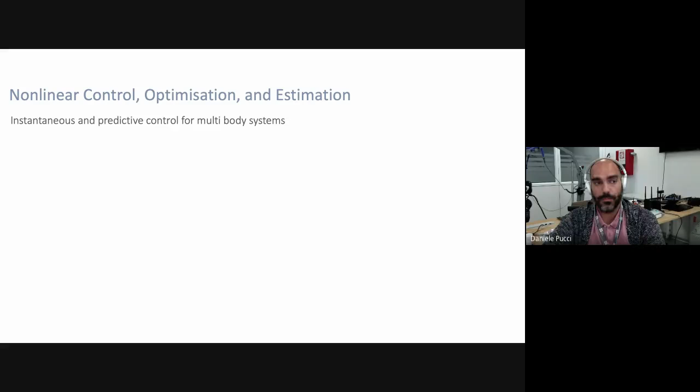As I was mentioning, we do research along fundamental directions. We are basically a group of nonlinear control people, and we do a lot of nonlinear control, optimization, and estimation. We also work a lot in model-driven engineering. Most of our controllers are fast prototyped in Simulink and MATLAB, and then we automatically generate code from high-level perspectives onto the real platforms.

And then we started working on reinforcement learning. So these are the fundamental directions that we have in the lab, that we apply onto vertical research axes.

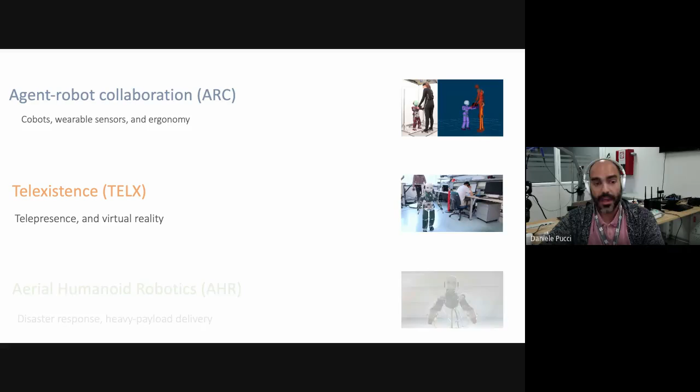The first one is agent-robot collaboration. We work a lot in human-robot collaboration. We also work a lot in so-called telexistence, which are advanced methods for humanoid robots. And then we also work in aerial humanoid robotics. Today I'm going to present some of the work we do here at IIT concerning flying humanoid robots.

First, let me talk about the why. Why should it be important to make flying humanoid robots? And in order to motivate this research direction, I want to show you a video.

This is Minami Sanriku. I never know if I pronounce it correctly, but it is a city in the northeast of Japan after the tsunami. As you see, the wave hits incredibly hard, and basically destroys everything in front of it. Then, back in time, the wave also hit Fukushima, and in that case, what we really needed was platforms that could go there and operate in place of humans.

More precisely, in these kinds of scenarios, if you really think about it, you need three fundamental capacities. You need platforms such as robots which have these three fundamental capacities.

You have fire between buildings, you have floods between buildings, so you want to overcome these kinds of barriers. You need aerial locomotion in order to overcome barriers such as floods and fire, and then move from one building to another.

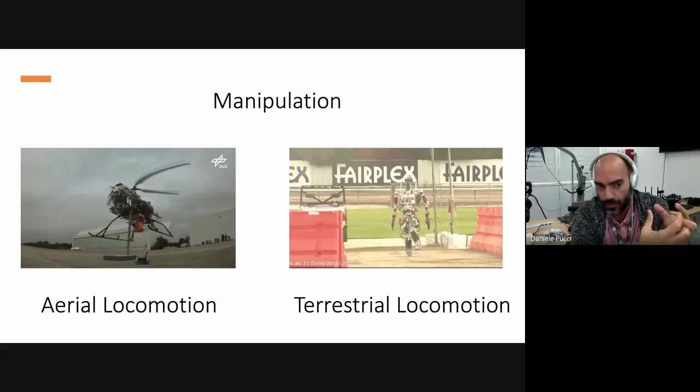If you look at the literature, there are basically two big fields. The first one, on the left-hand side, is so-called aerial manipulation, which consists of having quadrotors, flying vehicles with arms attached to them, so they have aerial locomotion and manipulation. On the right-hand side, you see humanoid robots, which have manipulation capabilities and terrestrial locomotion.

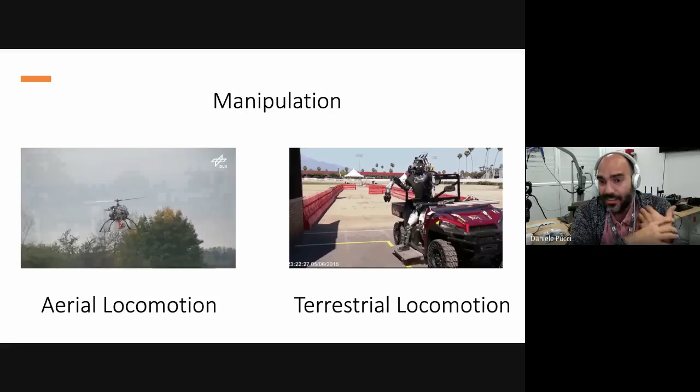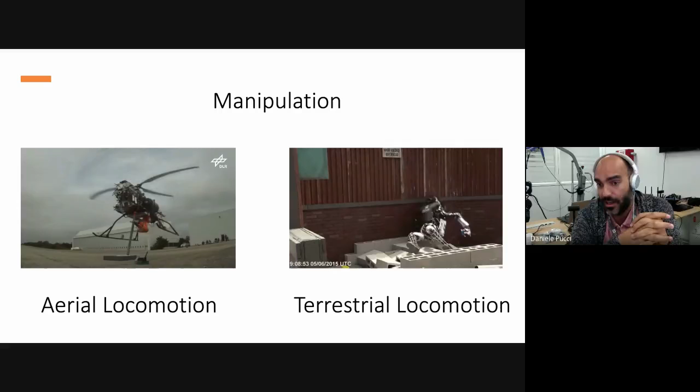So what are the drawbacks of these two systems? On the left-hand side, you have aerial manipulators. They are not really efficient when manipulating objects while hovering, and they are not at all energetically efficient while hovering indoor. They could simply land and move thanks to terrestrial locomotion.

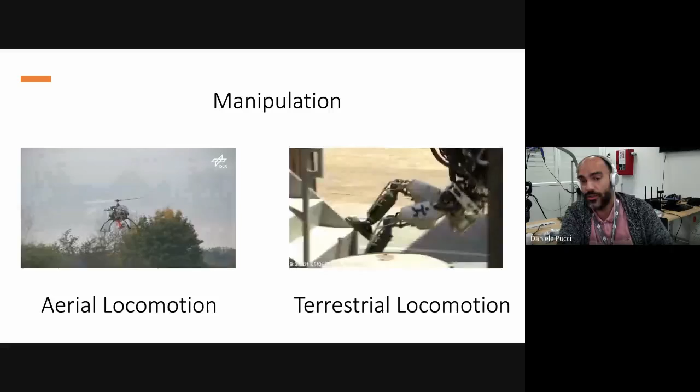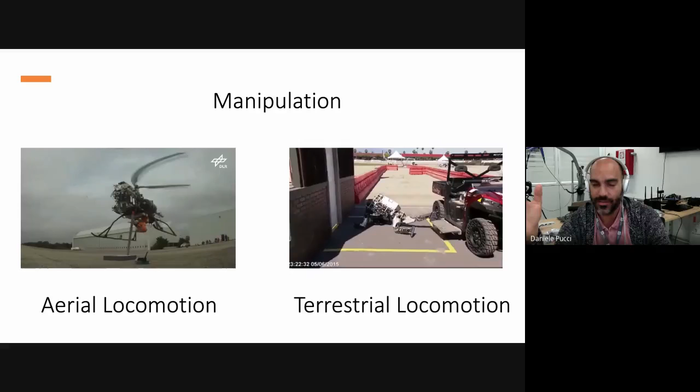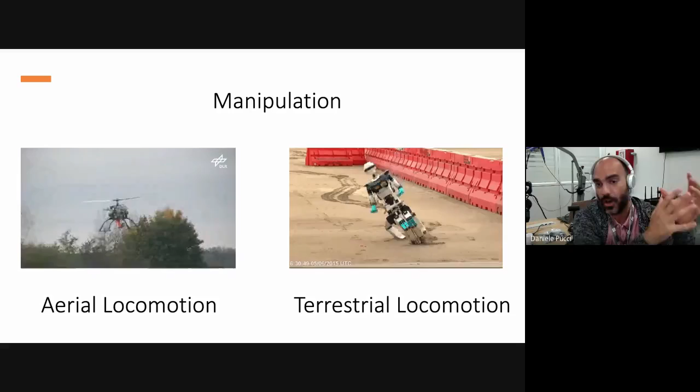On the right-hand side, you see humanoid robots with terrestrial locomotion capabilities, and these are the famous results from DARPA. Clearly there are awesome robots nowadays, such as Atlas by Boston Dynamics, but Boston Dynamics is one. Research labs are really struggling, and we are one of those, in making humanoid robots effective with terrestrial locomotion. So if it's already complex to make a humanoid robot walk in a lab, it's going to be much more complex to make a humanoid robot walk through fire and floods.

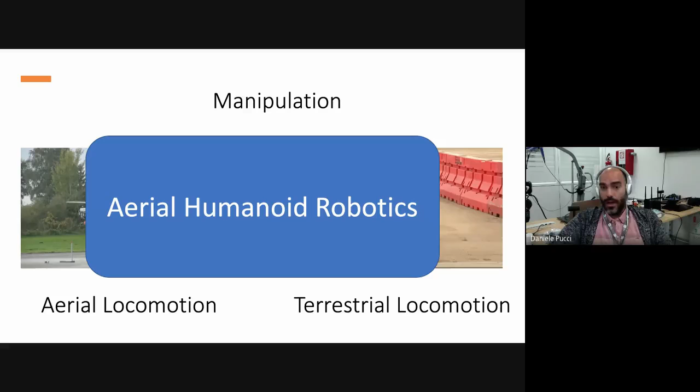So we need to unify these two things, and this is basically what aerial humanoid robotics is. It can be seen as the merge of aerial manipulation and humanoid robotics, so that we get aerial locomotion, terrestrial locomotion, and manipulation capabilities. So this is basically the why and what we are trying to do.

Let me talk also about what we started from, because we are a lab that works in humanoid robotics. So we started from software.

I just want to double check, do you hear me correctly? Yes, sir. Okay, great, so the sound is fine. The videos were fine, right? You saw the videos? Yes, sir, yes, sir, we could see the video properly. Okay, great, sorry for interrupting, but I just wanted to double check.

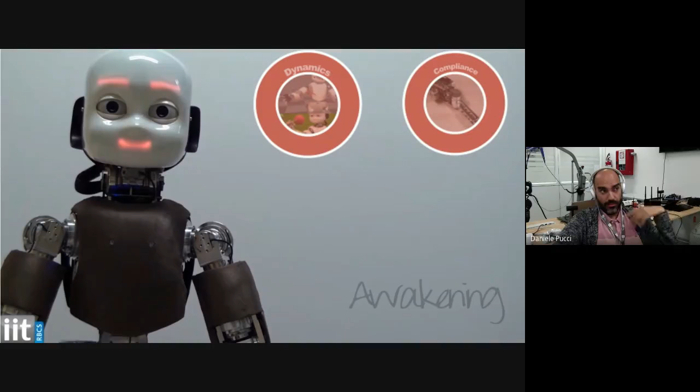So what did we start from? We started from iCub. I don't know how many of you know iCub. iCub is a humanoid robot born from a European project around 2005.

The objective back then was to make a humanoid robot which could develop cognitive abilities by interacting with the environment. So this was the goal back in time, and one of the fundamental points, in hindsight, is that iCub is a small robot which doesn't weigh a lot.

So its weight is about 33 kilos with a battery. And in hindsight, this was one of the fundamental properties of iCub. Anyways, to make it fly, clearly, if it weighs too much, then you don't have enough power in order to lift it. But anyways, this is what we started from.

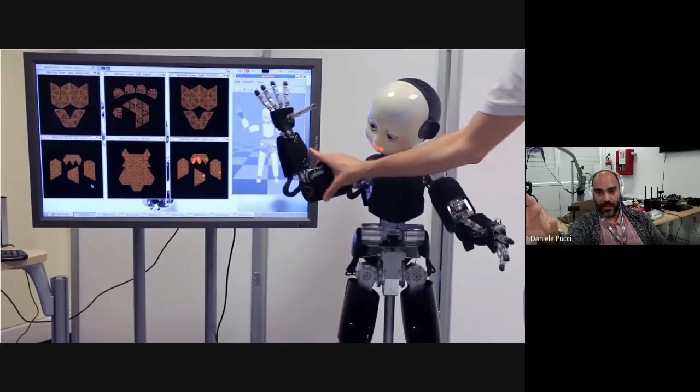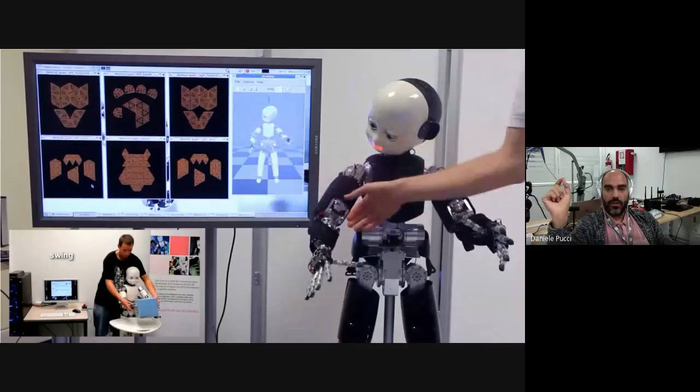iCub, just to give you a couple of insights into the sensors of iCub that we work a lot on. iCub has the skin, and in this video you see some of the red dots lighting up onto the monitor when the user touches the robot. These are the capacitive-based sensors which are all around the body, and basically these sensors give us where you touch the robot. Although now we also calibrate sensors so that these are also quantitative sensors, so we know how much you touch the robot, what is the pressure that you do on the robot.

But anyways, we use the skin in order to understand where you touch the robot. And then inside the robot, there are also force-torque sensors, as probably some of you know, and are basically 6-axis springs. So we develop 6-axis sensors inside the robot.

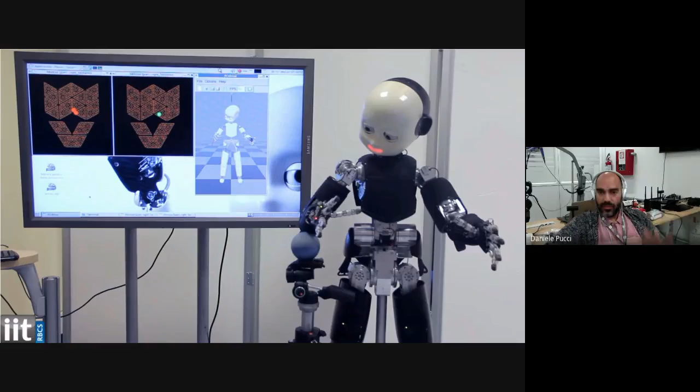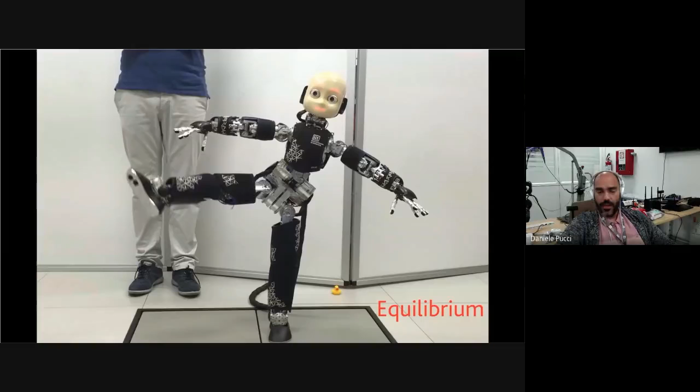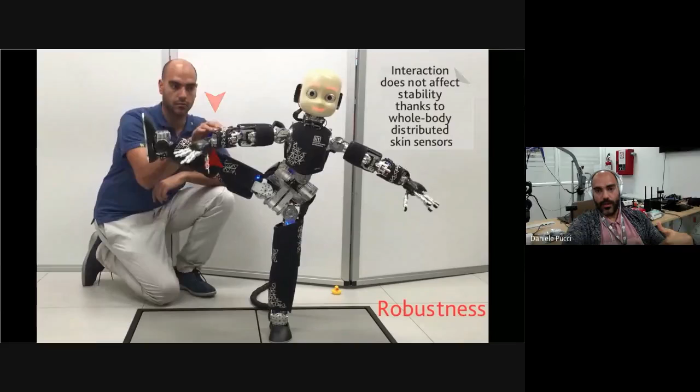So this is basically iCub, and we have been working a lot with iCub over the last 6-7 years. I arrived here as a postdoc, and this is one of the balancing capabilities of iCub that I have to say is still unique in the literature, because we were able to combine highly dynamic motion with compliance. Clearly you have robots which do back flips, but sometimes you cannot touch them. iCub has this other capability, which is compliant thanks to the joint torque control that we have been developing for years. So basically these kinds of capabilities are still unique.

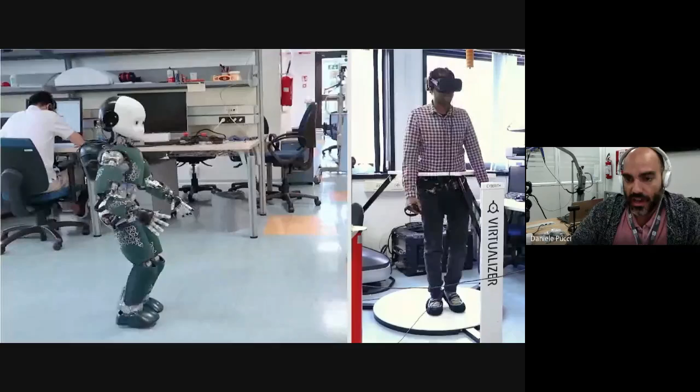So we worked a lot, not only on balancing. Then after a couple of years, we achieved also walking and advanced teleoperation with iCub. In this case, you have Mohammed, which basically sees what the robot sees, and then we do here the so-called retargeting. So all the human motion is projected onto the robot, which basically copies the human.

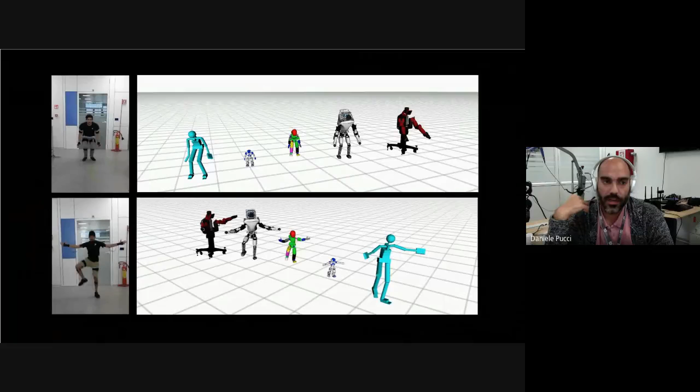In this perspective, we will be participating in the ANA Avatar XPRIZE, and we are working on making this entire infrastructure better. Another thing that we'll be working a lot on is retargeting directly from IMUs.

So here you see Lorenzo and Prashant moving around, and basically what you get is that we can project the human motions onto several robots with different topologies. This is one of our results. You can check out the papers that we have out there, and then we applied it to iCub. So you can project all this motion onto iCub, which basically copies the human.

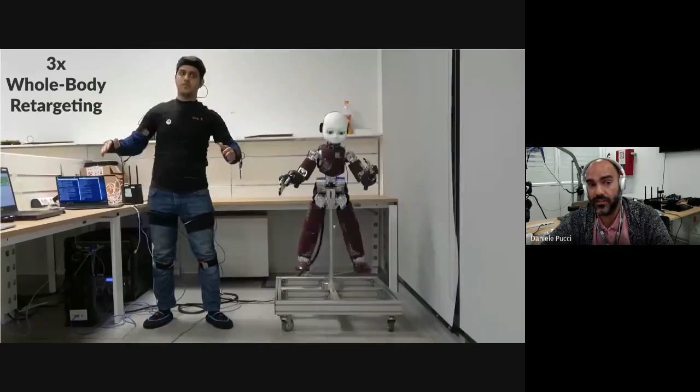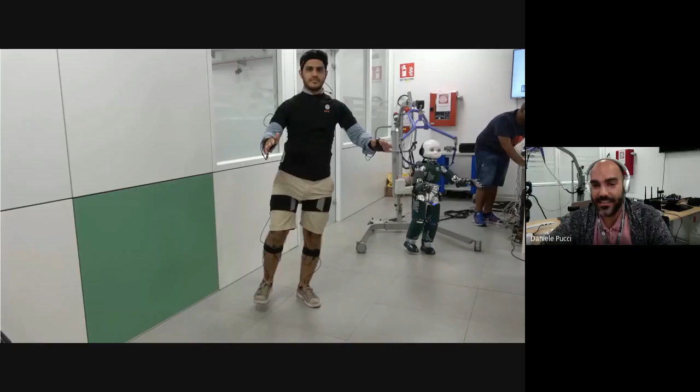It's important to say that we develop all our algorithms. So in this case, we are using Xsens as a set of wearable sensors, but we use it as a set of IMUs. This is important, and actually, more precisely, we are developing our own system for wearable sensing, which we call iFeel.

Then the nice thing is that you can also basically do the motion that you saw before, the balancing that you saw before, while copying a human. And this is one of the latest results achieved recently concerning retargeting.

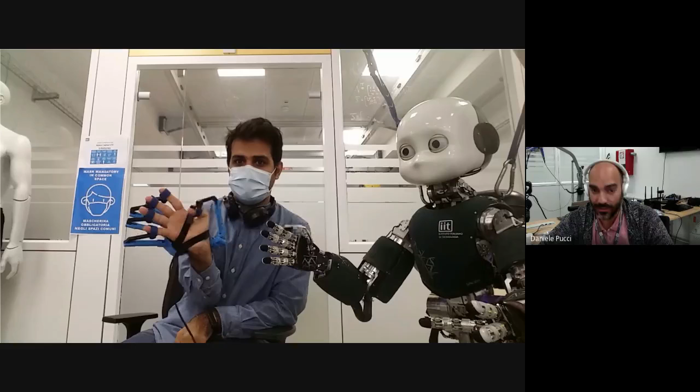And we are moving one step forward because we want to retarget not only the body, but also the hand. So we are integrating different systems in order to get basically full body retargeting, but full body including the hand of the user.

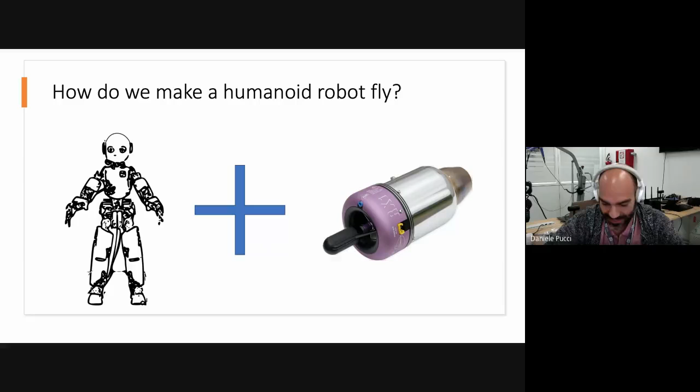So the idea was simple. We take the humanoid robot iCub, and then we equip it with jet turbines in order to make it fly. Then it turned out to be a little bit more complex.

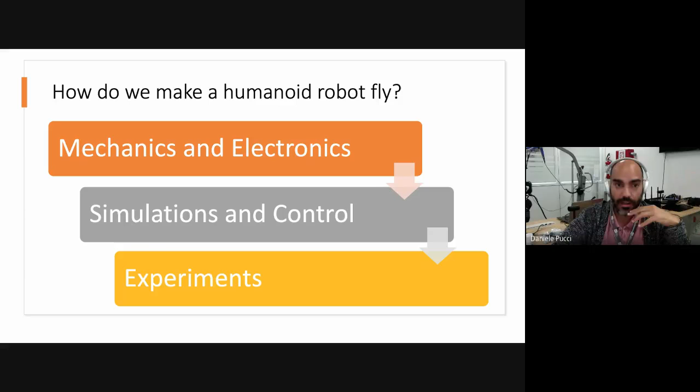Let's start with the mechanics and the electronics. The idea was, okay, we have the robot. The robot is iCub, a 53 degrees of freedom robot, 33 kilograms, and we want to make it fly. How can we do it?

Well, we have to design another version of iCub that we call iRonCub. So iRonCub is what we refer to as the flying humanoid version of iCub.

Since the weight is 33 kilos, what we thought is, if we attach two turbines in the back, each of which is 20 kilos, and then at the hands we attach jet turbines of 10 kilos each, we have an overall thrust of 60 kilos. As a rule of thumb, this should give us enough thrust.

We designed a version of iCub which must have some additional equipment, so it's not going to weigh 33 kilos, but it's going to have something more. But we have a difference of thrust that we can exploit, because the total is 60 kilos.

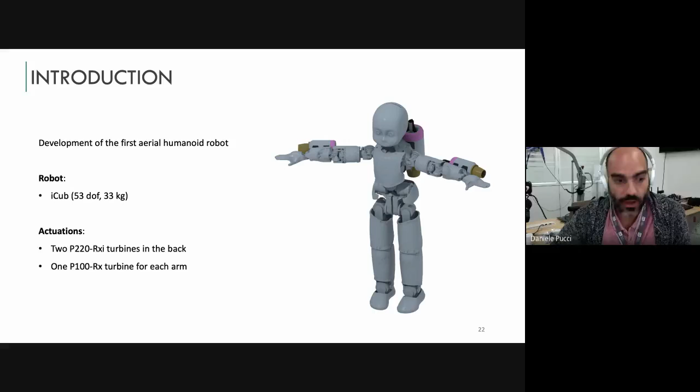So the first version of iCub was basically what we call iRonCub version 1, and the requirements were that the battery had to be off board because we already had enough energy sources around the robot, like kerosene, and iCub costs 250k euros.

Clearly, one of the big concerns in the beginning was to avoid that it explodes. So the battery had to be off board, then the communication through the LAN, and then the fuel tank had to be off board, because in the beginning we really wanted the robot to have all these sources of energy close to the robot.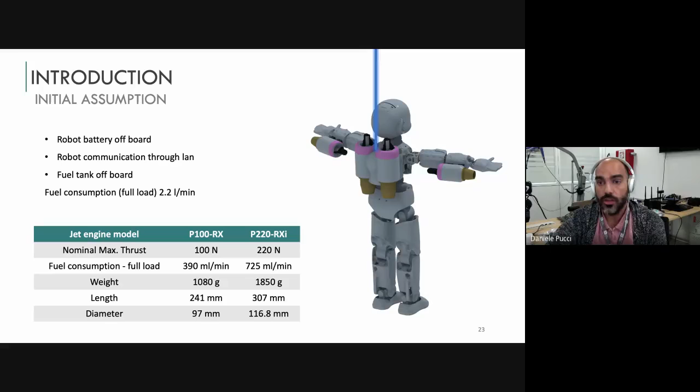So then the first question was, okay, if we want to install jet turbines into the arms, how can we do it? The requirements were that since we don't have, as a lab, two or three iCubs, we had to deal with a fast assembly of installing the turbines.

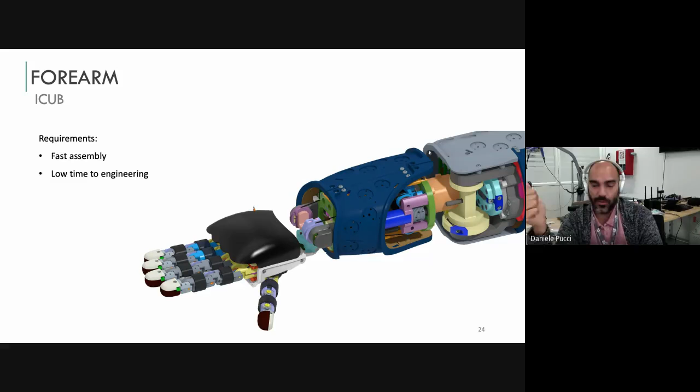The robot had to also keep working in nominal conditions for the other research directions we had, like physical human-robot interaction and tele-existence, the guys had to work with the robot. Since we couldn't afford to build another robot, what we had to do was something plug and play. One of the requirements was that it had to be fast to assemble, and secondly, low time to engineering.

If you look at the arm, basically we removed the forearm and we designed a mechanical interface which could contain the jet turbine. We removed the hand, first of all, because in the first instances it's not going to be fundamental for flight, and secondly, because it's a costly part of the robot.

So this is basically what we replaced the forearm of the robot with: a jet turbine with a mechanical interface that can be interfaced with the arm of the robot and attached. Then we rapidly prototyped the forearm. So this is the rapid prototyping that we did.

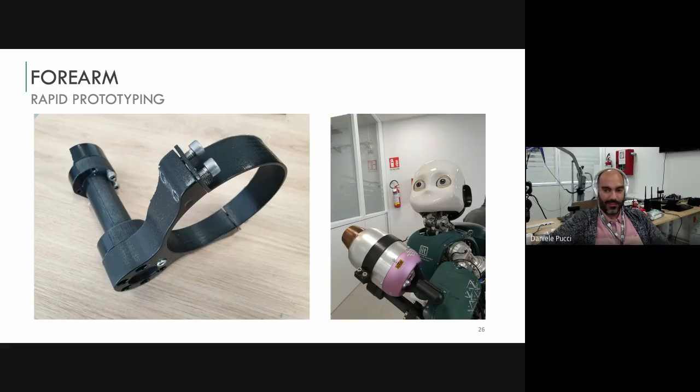We do a lot of prototyping, fast prototyping, not only at the software level with our basic development in MATLAB Simulink, but also a lot of fast prototyping in mechanical engineering. So we 3D printed the forearm, and we also discovered there were some issues, without entering into details, but this was a fundamental phase in order to understand the limitations.

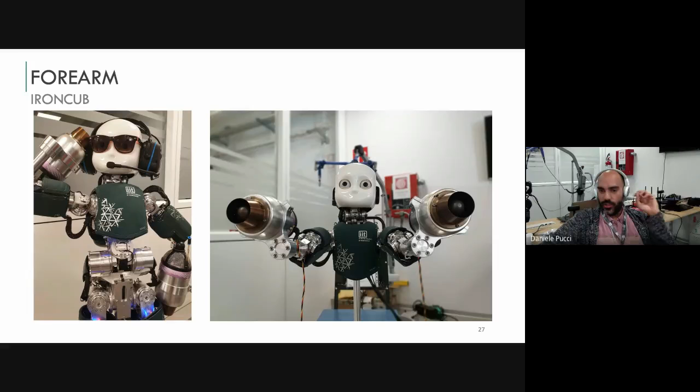Then we finally understood what the problems were, and we fixed it. So we designed the final version of the forearms. Then the problem was the jetpack. So for the jetpack, once again, the robot had to be the same.

One of what I personally think is one of our biggest achievements is that we are able to keep the robot with 800 degrees Celsius flames, and the day after it does physical human-robot interaction with wearable sensors. In this, we really somehow achieved this goal.

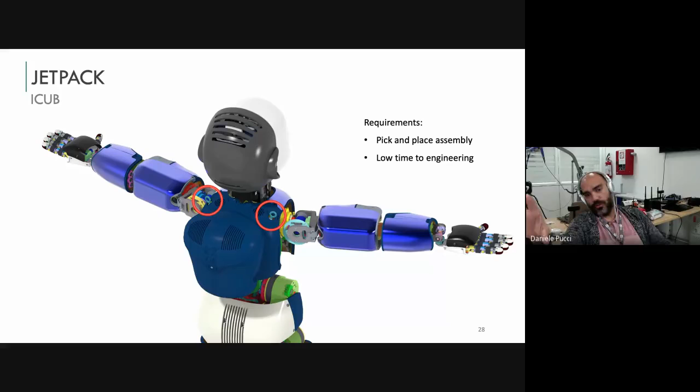iCub usually has 2 attachment points that we use in order to lift it up when it's walking and to avoid that it falls down. These 2 points somehow attracted our attention, because they could be those to which we could attach the jetpack.

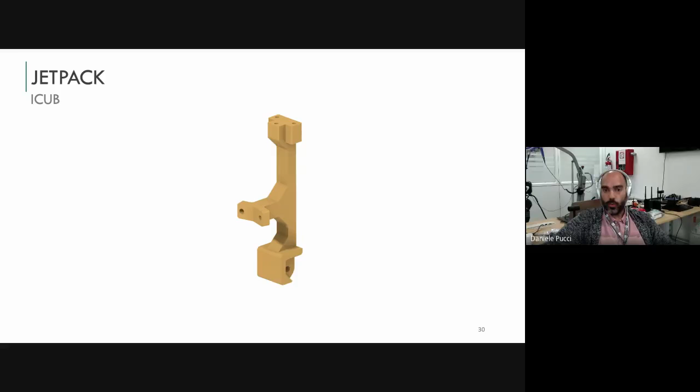There are these 2 points which are really interesting, but then we said, well, we have to find another one, because we need at least 3 points in order to attach the jetpack to the robot. So the idea was to basically make a backbone of titanium, passing back the robot, and this is what we did. We found an empty spot in iCub in order to make this backbone to which we could attach later on the jetpack.

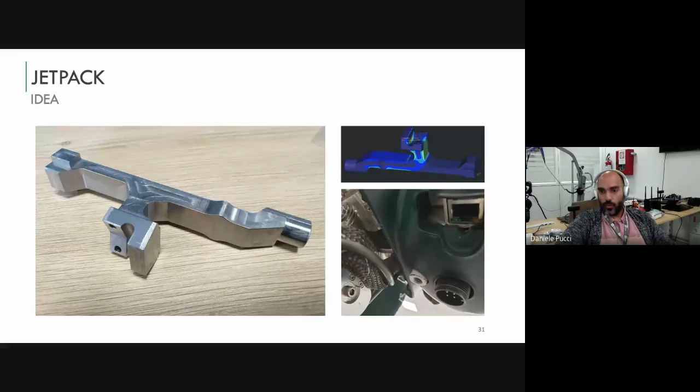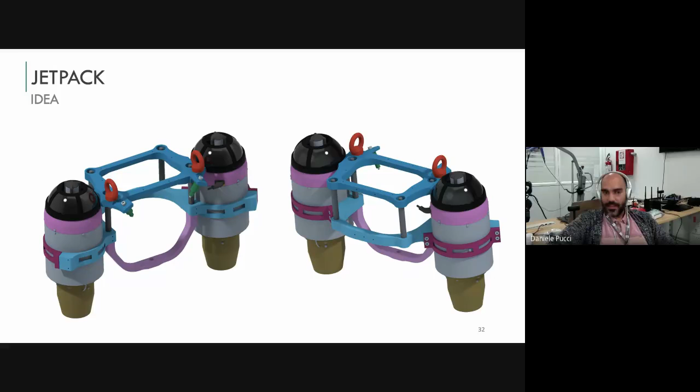Clearly, we did a lot of FEM, finite element analysis, on the piece in order to understand that it could withstand the tensions and thrust forces that we were expecting. This is basically how the jetpack looked like at the design level—these are the 2 turbines, and that's the jetpack that we designed.

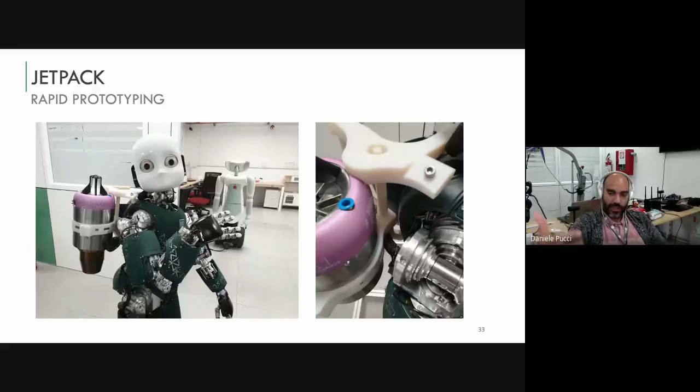We fast prototyped the jetpack, 3D printed, and we discovered some issues. Actually, we discovered that some of the cables of iCub were touching the turbines, and being at 800 Celsius degrees, we really had to avoid this. So we simply said, well, this is not possible, and we had to modify the jetpack again. We designed some cover, both for the wires and also for the jet turbines.

The jetpack is also endowed with some electronics, and this was part of the design. We had to think about the electronics of the jet turbines. Without entering into the details, this was one of the difficult parts, because the electronics of the turbines couldn't be far from the turbines, even because some of them have the valves for the kerosene to be injected. So it had to be there, the electronics, and we built all the electronics.

Another component we designed was the Aruco symbol in order to do the so-called floating base estimation. You have to estimate where the robot is, and in the beginning, without making the algorithms too complex to actually work out when the robot is balancing or walking, we decided to simply come up with an Aruco symbol.

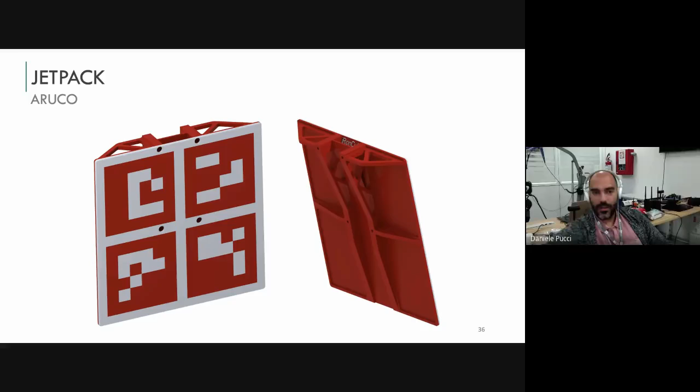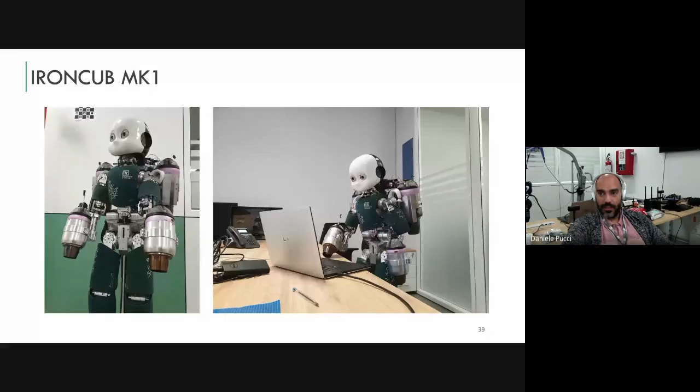This is basically the IronCub version 1, and as you see, you have both the turbines in the hands and the turbines in the jetpack, and basically this is the mechanical design.

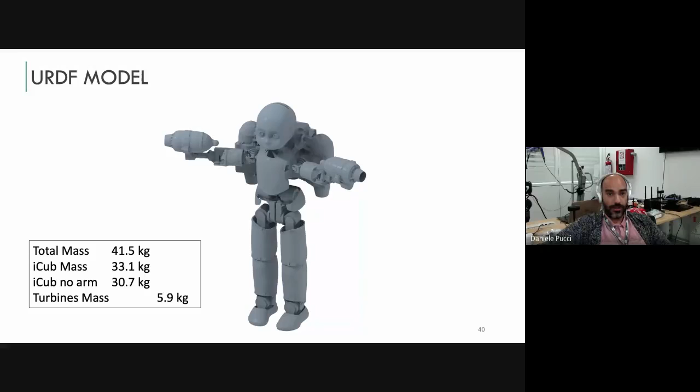After we did the mechanical design of the IronCub, we had to build the model. Probably some of you know the URDF format of the model, which is fundamental in order to close loops, if you want to do model-based control. So if you want to do model-based control, you need a model, and we generated automatically the model, the URDF of the robot, directly from the CAD.

So this is basically one part of the work that we've been doing, and then there is simulations control. Once you get the model, then you can hope to do something.

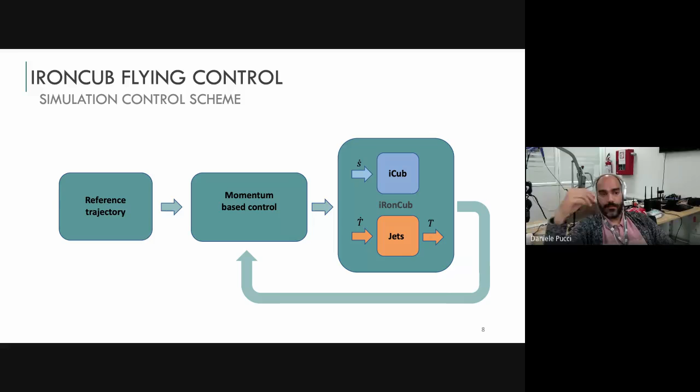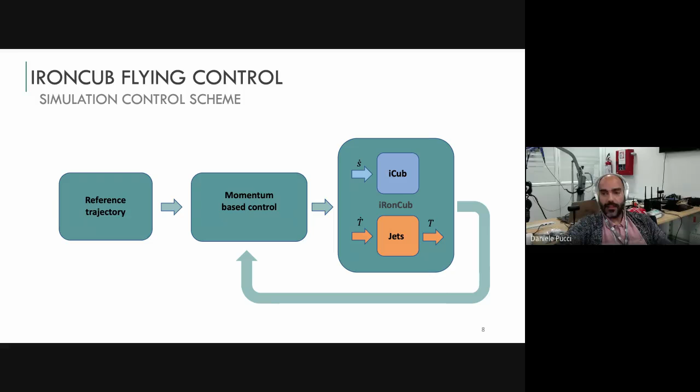We assume there is a block which generates reference trajectories, flying from point A to point B. Then there's a momentum-based control, an extension of the balancing control you saw before. This is a QP, quadratic programming control, which assumes that the joint velocities, S dot, and the derivative of thrust, T dot, are control inputs that go to the jets. The jets then create the thrust. That's the overall architecture.

The control objective, without entering into too much detail—all the papers are out there, you're welcome to check our scholar profiles for people interested—was the asymptotic stabilization of the robot's centroidal momentum.

The centroidal momentum is a concept in humanoid robotics and multi-body systems that extends the concept of momentum. The momentum of a body is mass times COM velocity, the center of mass velocity, and then you have angular momentum, which is basically inertia times angular velocity. In multi-body systems this concept changes a little. What is the angular velocity of a humanoid robot? You cannot actually answer this question. So one of the big problems is how to extend the momentum.

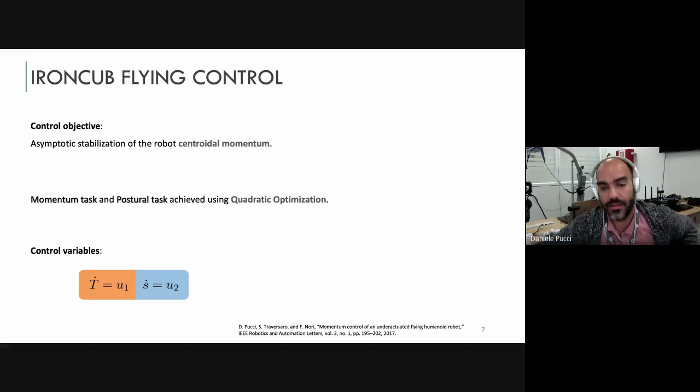But anyway, by using these concepts you can synthesize controllers for flying humanoid robots. As I mentioned, we assume the derivative of thrust is a control input, and the joint velocities of the robot are control inputs. Which kind of performance can you achieve?

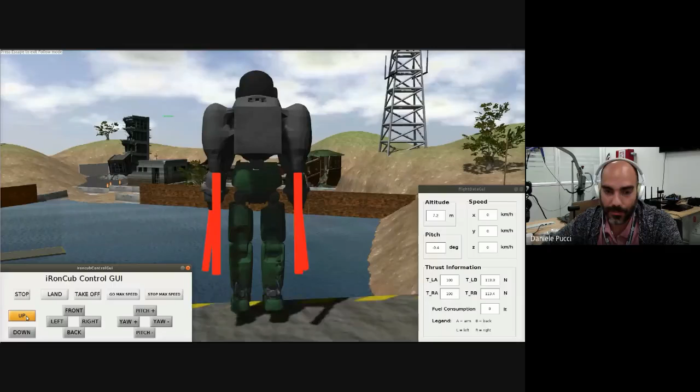This is basically what we could achieve, in Gazebo—probably some of you know Gazebo, this is the version for iCub. Everything is in Simulink, so you get a GUI. We have a takeoff phase and we achieve basic takeoff. Once you stop, there are configurations which optimize for velocities, and that's the high-level control we can achieve and simulate in Gazebo.

After this, as I mentioned, we assume we can control the thrust derivative and the joint velocities. Concerning joint velocities, this isn't a big problem because you can basically do the so-called inverse dynamics controllers, although it's a bit more complex than this. The right-hand side isn't a big deal—one of the big problems comes from the left-hand side.

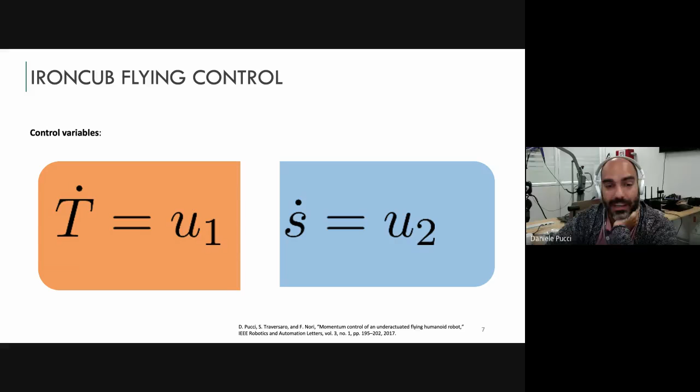So how can we model these jet turbines? This is not really easy, and something we've been working a lot on. If you have a jet turbine, what control input do you have? You have a handle, which is the throttle—a signal that goes from 10% to 100%, and this generates thrust.

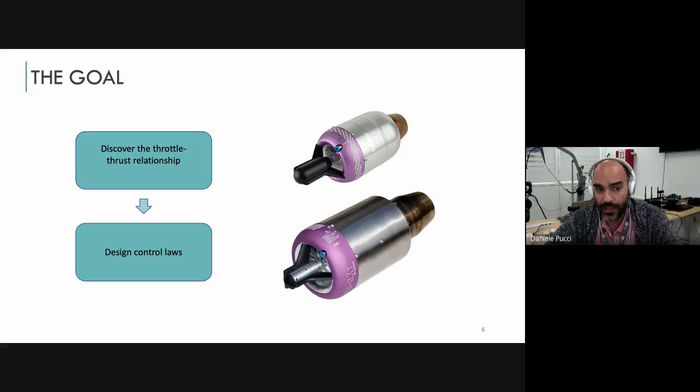It's important to say you don't really get a lot of information from JetCat, the supplier for jet turbines. It's really difficult to understand how to turn them on, and most importantly how to turn them off. We had to do a lot of reverse engineering work to develop a model for these jet turbines. The approach was: first discover the throttle-thrust relationship, and then once we get the model, since we do model-based control, we design controllers.

How does a jet turbine work? It works in a very complex way, but to simplify, it's composed of four parts. From left to right: the intake, which is the first part of the compressor, then acceleration of air through the compressor, then the combustion chamber where you have the explosion which increases air velocity, and then the turbine itself, which is connected to the compressor. The more the turbine rotates, the more the compressor rotates, and the more air goes in.

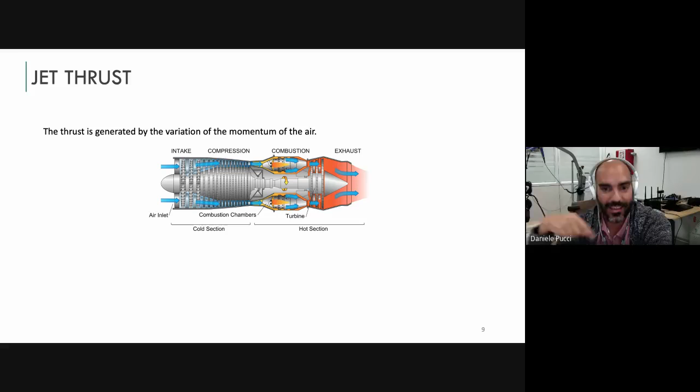This phenomenon basically lets more air go in and self-feed itself, so you can generate a lot of thrust. If you go into the thermodynamics of jet turbines, it's complex—not something simple at all.

The thermodynamics and all the dynamics around the thrust generation phenomenon are not easy to deal with. It depends on a lot of things: air pressure, temperature, propulsion system efficiency, fuel type.

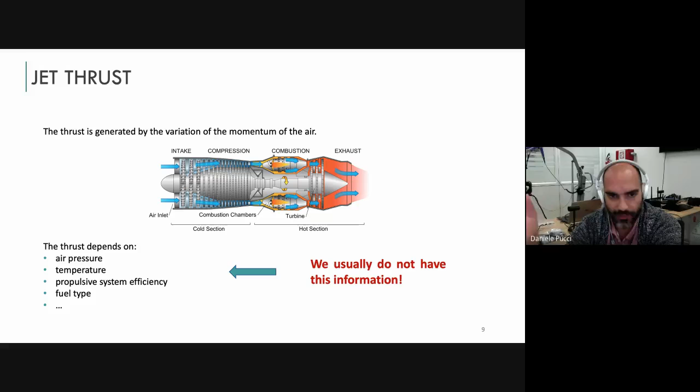At a certain point, we perceived that if we proceeded in the classical way, we would get stuck, so we had to find another way. The other way was to be data-driven: do the data acquisition, then model selection, then parameter estimation. So this is what we did.

First of all, we had to select a model, and we selected it by looking at the data. This approach is really data-driven. By looking at the data, we discovered that the jet dynamics was basically a second-order system, and we had to model a second-order system.

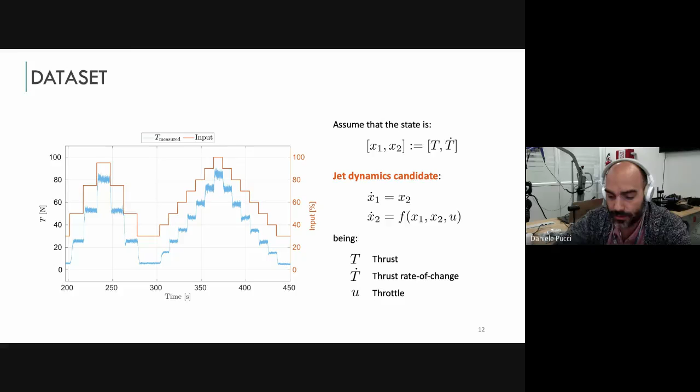After this, we used sparse regression identification in order to select which model. This model was estimated using both least squares methods and extended Kalman filter based methods.

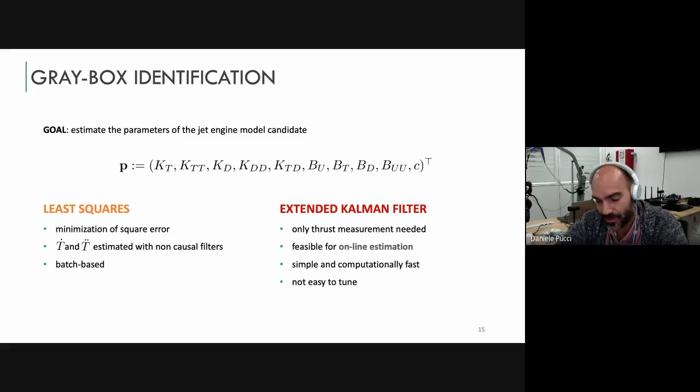Just to give you an insight on how this was done: after the model selection, we had to basically control the system, because once you identify the model, you have a model that you can close the loop with.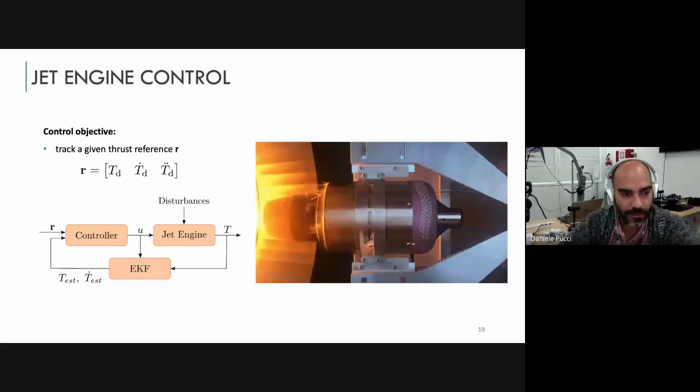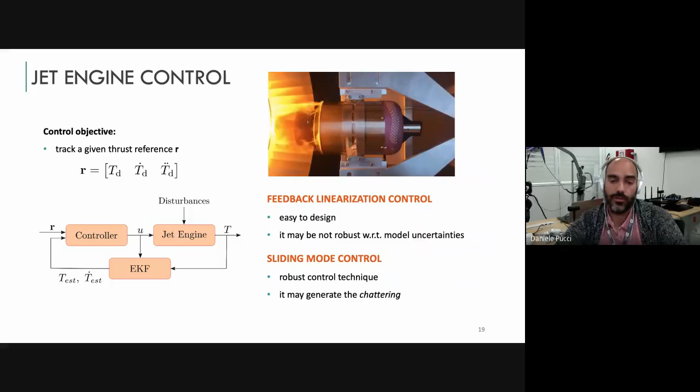Since we got the model, we closed the loop and developed two kinds of feedback controllers. The first one was a classical feedback linearization control, and the other was sliding mode techniques. Although in simulation sliding mode controllers outperformed the feedback linearization, at the end of the day the feedback linearization control was better in practice.

In this picture, you see the real experiment—the real control of the thrust. You see that the tracking is pretty somehow satisfactory. On the left-hand side picture, the desired is basically the yellow, and the estimated is the red one.

We have online extended Kalman filters which exploit the model we just discussed in order to estimate the thrust, and that's basically the control of the thrust. So given that we were able to identify the jet turbine, which is something complex, by using a data-driven approach, and once we fixed the model, we were able to close the loop and stabilize a desired thrust.

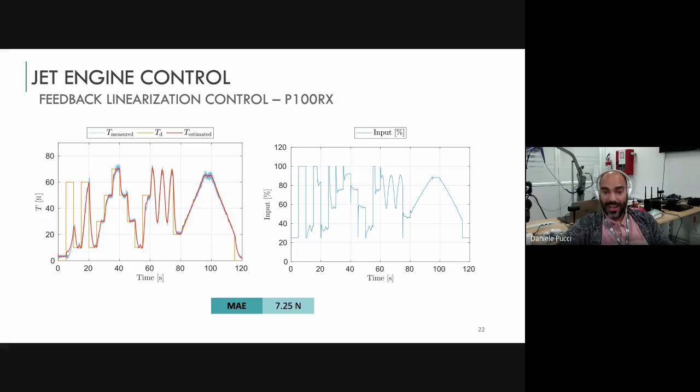If all of this concerned simulation control, let's talk a little bit about experiments. I cannot show you all the experiments we are performing now because some of the results are kept classified, but anyways, let me show you some of the things we're doing.

First of all, once again, the hardware—it's not something really easy to deal with. We have these two kinds of jet turbines: the P100, which generates 100 newtons, and the P220, which generates 220 newtons. The exhaust gas temperature is about 700 to 800 degrees Celsius, so you have to really pay attention when doing these experiments.

So if you look at the hardware, how is it composed? You have the engine, then the ECU, the electronics control unit, then the battery, which is fundamental in order to turn it on, and then the fuel pump, which you need in order to inject fuel inside. We basically had to develop an interface in order to acquire data and set desired performance to the computer.

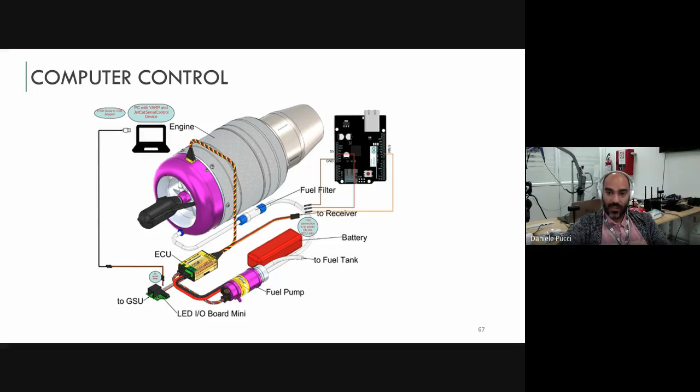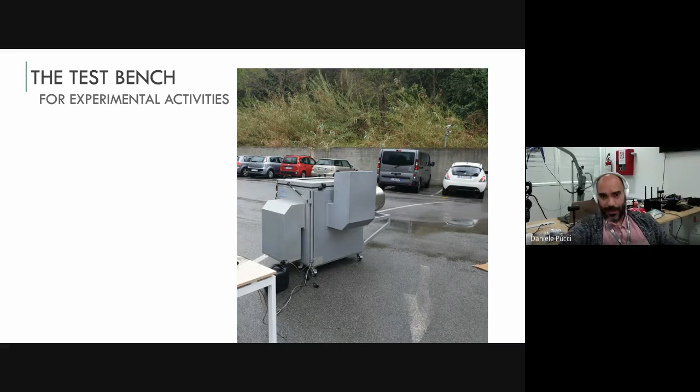One of the most important things is that they can explode. So in order to work with this stuff, you really had to somehow pay attention. We had to develop a bulletproof test bench in order to do the experiments inside.

Since we worked a lot on FT sensor calibrations, we developed this bulletproof test bench onto which we have this V-shape that can move, and once it moves, it bumps onto an FT sensor from which we can retrieve data, and then we can set a certain number of profiles that we use to identify the system. So this is the FT sensor, and this is basically the overall shape that we use.

The flames that you see here are actually inside the test bench. So we use the test bench to do model identification and control of the jet turbine, which is a fundamental block in order to go forward.

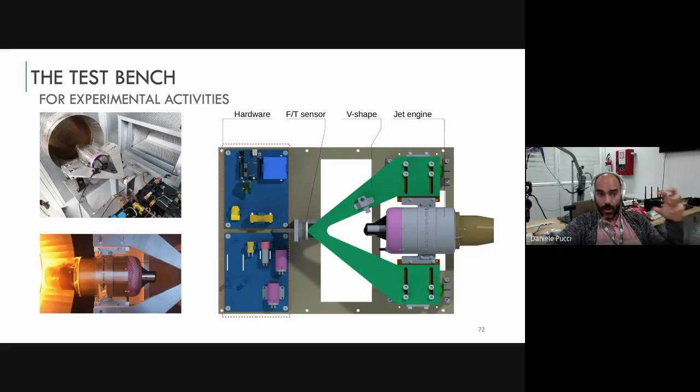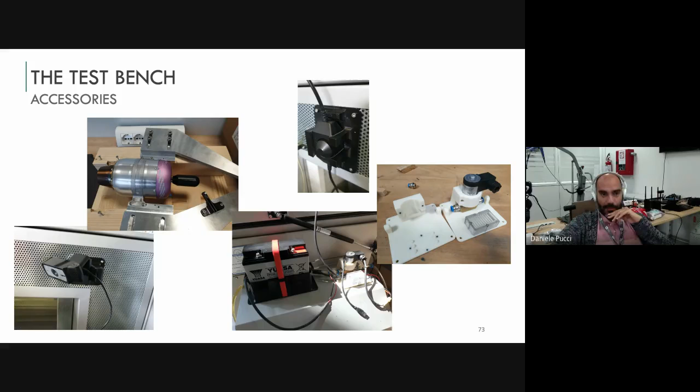Clearly there are a certain number of accessories inside the test bench. We also have high quality cameras because everything is recorded. And then we had to develop a software infrastructure based on YARP, which is the equivalent of ROS, basically that we use in iCub, and it's an alternative to ROS.

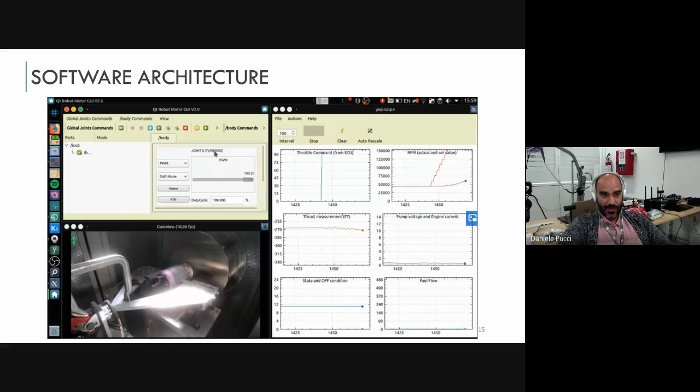We also developed a lot of diagnostics in order to be sure that everything was going fine concerning the jet turbine identification. And this is one of the experiments.

You basically have the turbine. On the right-hand side, the little circle that you see is the FT sensor. On the left-hand side, you don't see it, but there are flames at 800 degrees Celsius. So the fuel goes inside, and we can control the turbine.

Now, what about the real robot, where we are? As I was mentioning, I cannot show you a lot of videos right now. Actually, yesterday we had the first full robot experiments, but I cannot show you those videos. I can show you some of the videos that we have.

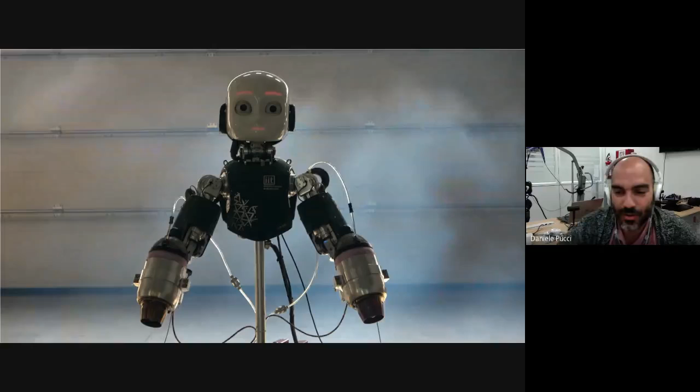So this is basically from last year. This video, I don't know if you hear the sound. I don't think so, but the sound, I can tell you, is a little bit impressive. In this experiment, we had to check that the arms wouldn't break apart. Simulations showed that this wouldn't have happened, but we had to check that somehow the robot could withstand the total torque.

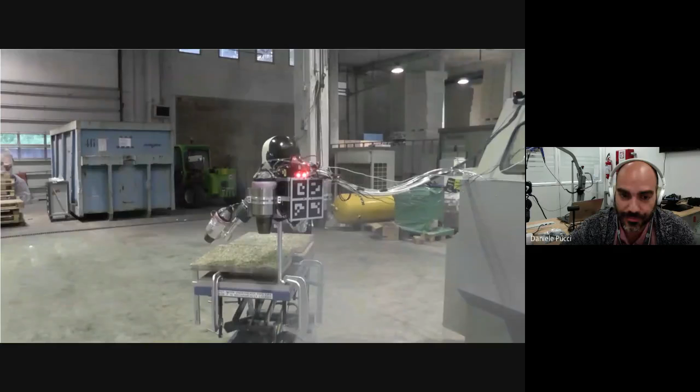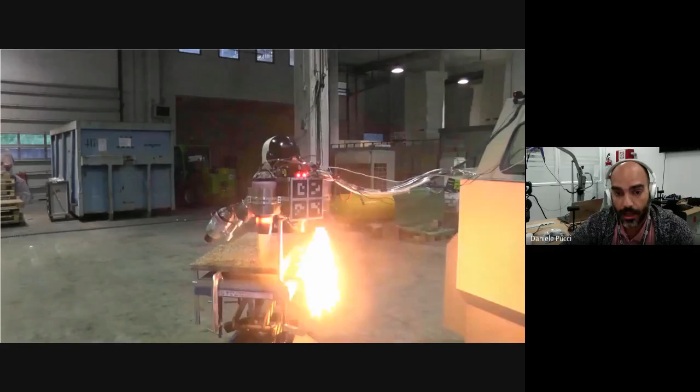So this concerns the forearm, and then we have also the jetpack. This is last year's experiments, and I show you this just to show you that the complexity of these experiments is a couple of orders of magnitude beyond other things that we do, because there are, on one hand, really safety issues that we are not really used to, and on the other hand, equipment that may harm people working with the robot. So this is just to give you an insight into the complexities that we have to deal with, but I think we did a great job in this.

So basically, this ends the presentation. I want to thank the entire lab for contributing to this great research. In particular, the so-called iRonCub guys. There are many, and some of them have already left, but just to mention those that are in the lab now and working in this research axis: Hosameldin, Giuseppe L'Erario, and Fabio Bergonti. Then we have Punith Reddy, and the team is led by Gabriele Nava, who is the Scrum Master of the iRonCub team.

So basically this ends my presentation. I don't know if you have any observation on this, and I am happy to get the question in that case.